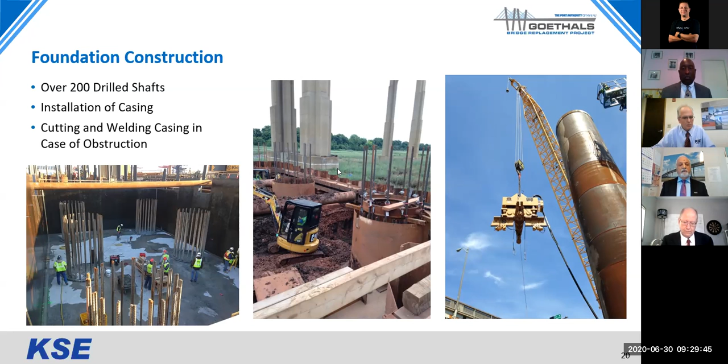Before we got into the rock, of course, we would look at the boring logs as well as the resistance of driving the casing into the ground. We would know that we were getting close, and also with the extraction of the spoil from the drill shaft, we would notice that it was getting close to the weathered as well as competent rock. Once we got there, we would go through the rock and make a rock socket.

After the rock socket is excavated and everything is done, we have to use the shaft inspection device that we would send down there to take 15 readings. 8 readings, according to spec, were supposed to show less than half an inch of sediment after airlifting and cleaning out at the bottom of the rock socket.

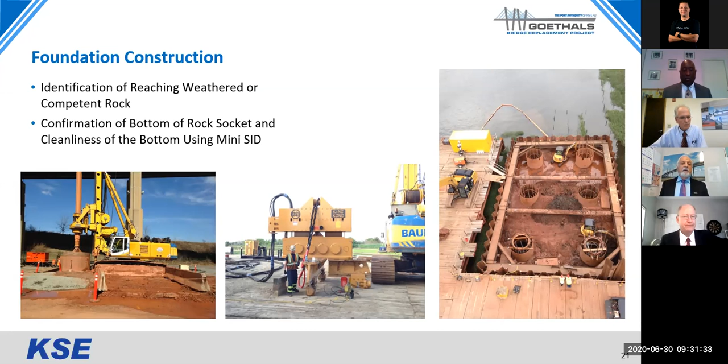Once that was done, with the inspection of the geotechnical EOR from the designer, us, KSE, Port Authority, as well as the contractor, we would verify the cleanness of the drill shaft as well as the rock socket, and after that they would bring the rebar cage. All of these rebar cages were fabricated in Port Ivory, which is on the New York approach side. Next slide, please.

Actually, the rebar cage was made out of the black rebar, and as you can see, we had the cage ring, which is stabilizing all the rebars. On the perimeter of this rebar cage, we have provided, every 1 foot, a 1.5 inch steel pipe, which is plugged at the end of it.

So these are used for the CSL testing, cross-hole sonic logging, after we place concrete in the drill shaft. So once they put the cage in, inside the steel casing, we put centralizers to make sure that it is centralized inside the casing.

And then we use the tremie concrete with the bucket as well as the pump concrete. Once the concrete has come up, at the top portion of the rebar cage on the drill shaft, we had to connect the black bar to the epoxy or galvanized bar, which is going to be connecting to the rebar cage of the pier column. As I said, these are all an integral part.

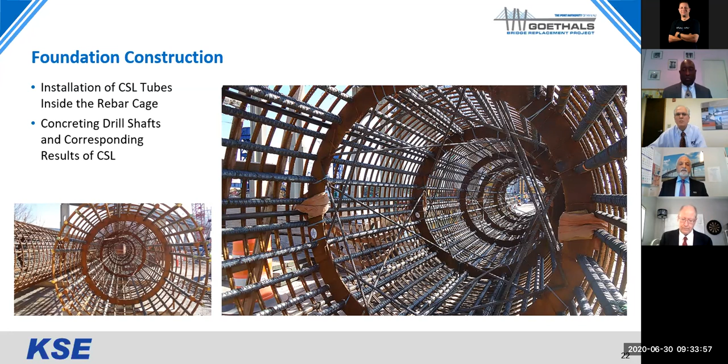Now, on top of the drill shaft, once we bring all the concrete, it's going to combine with the water which was actually inside the shaft. So the laitance comes up, and we still keep pouring until it overflows from the top of the shaft. After it dries out, we have to bush hammer it and make sure everything is clean.

And then on top of that, we connect the rebar cage of the pier column to the rebar cage of the drill shaft with the Lenton couplers. And of course, we have to make sure that the tolerances, everything is taken care of and measured. And then we use the EFCO form for the pier column.

As you may notice, because of the 4% slope of the approaches, the size and the length of this pier column as well as the diameter is different. We had from 4 feet to 9 feet in diameter, 19 feet to 115 feet in height. And for that, we pour the pier column from 1 lift up to 3 lifts.

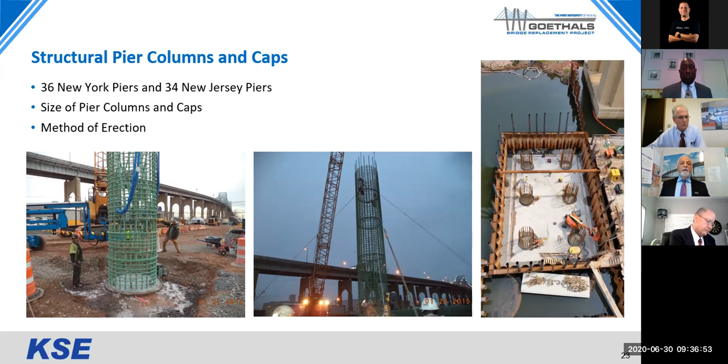I have to mention the fact that through the drill shaft, at different locations, we would have to bring the lightning protection, which comes all the way from the drill shaft, goes to the pier column, and to the pier cap. Next, please. Next slide.

And now, placement of concrete: as I mentioned, between 1 to 3 lifts, we had to do it in different stages for the pier column as well as the pier cap. Now, I have to tell you about the expansion joints of the whole project. This project was done in such a way that it would act as a simple support for the dead load, but continuous for the live load.

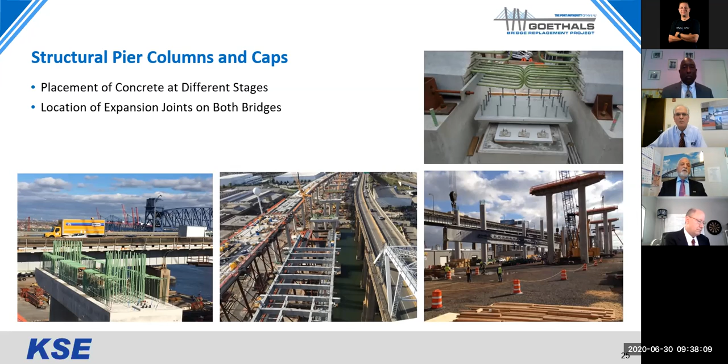These are the 110-ton weight, 8 feet in height, and 175 feet in length. They would come sit on top of the pier cap, and then it would be embedded into a very complicated diaphragm. The diaphragm that contains and combines these girders on top of the pier cap was between 15 to 18,000 pounds of epoxy rebar.

And for the placement of the concrete in that area, we had to use 3 different types of concrete for the diaphragm. This was actually an integral part of that one. Of course, for that area we did have basically embedded cast-in-place concrete, and as I mentioned before, they have three different types of mix design for that one.

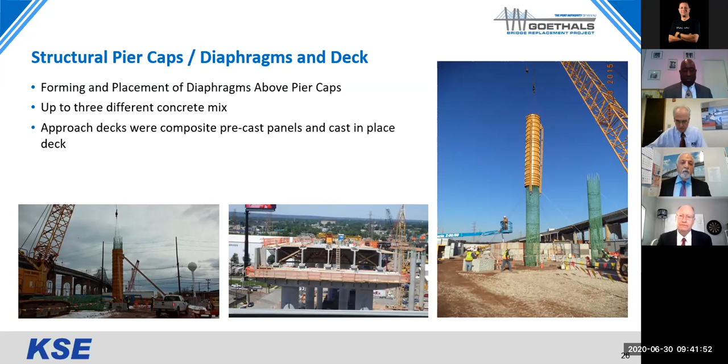Now, on the New York approach of Goethals Bridge, the existing one was the railroad bridge, which had about 6 spans and concrete piers as well as a structural steel railroad bridge. For expansion of this new bridge, they had to remove all those pier columns as well as the structural steel and build a brand new one.

And then on Columbus Day of 2017, one weekend, we had to remove everything which was left from those existing pier caps, as well as the pier columns and structural steel. We removed everything and put all those pier caps that were cast in place on top of the new piers, 2 pier caps in the middle of the whole bridge, as well as the structural steel.

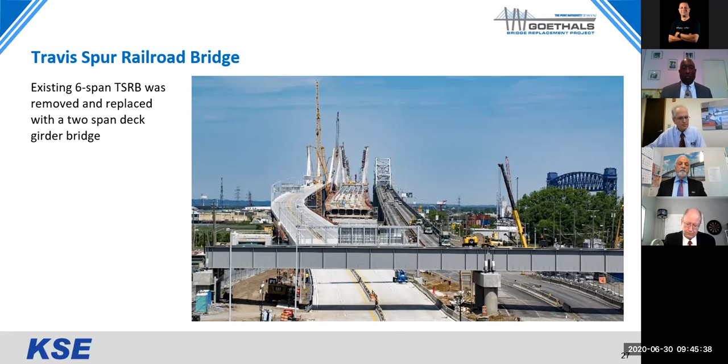The contractor, KWM, had 68 super foremen and all types of inspectors, as well as workers of different fields and expertise. KSE provided 12 inspectors around the clock for the whole weekend, and it was done successfully with no glitches, and everybody was satisfied with the performance of everybody involved.

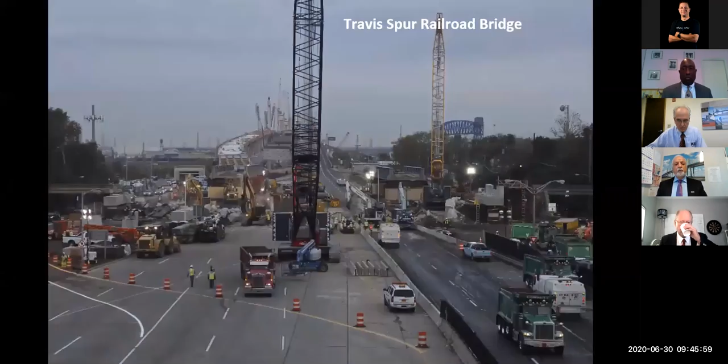There's a time lapse on that one that we should be able to see. You can see the operation was well coordinated with 2-3 different types of hoe rams attached to the excavators. We had 2 huge cranes, as was mentioned by James in the beginning of the introduction.

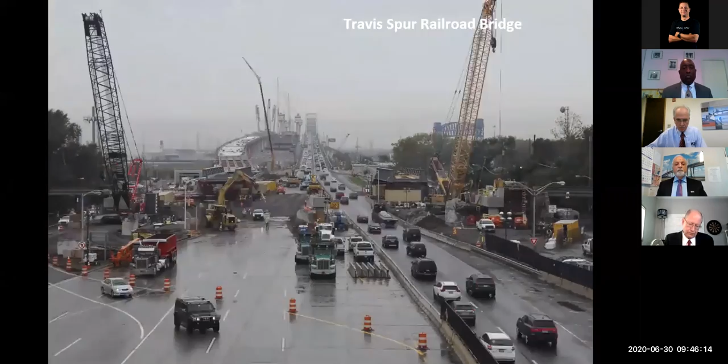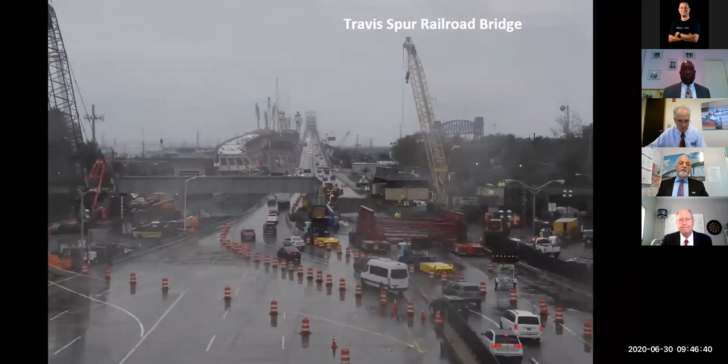There were 27 cranes that the contractor used through the construction of this project, and I had to review the calculations of those cranes. I had to go through all the control checklists and send them back to Shapiro Associates, who were basically in crane construction in the whole tri-state and very well known. They have written specs on the cranes, and if there was any comment I had to make sure that everything was taken care of before I submitted to the Port Authority for final admittance of the contractor bringing those cranes to the job site and utilizing them for the different tasks they have. That was one of the things.

I have to mention that, of course, as James was saying, for the whole entire job, we had 6,000 items of punch list. We had 3,300 NCRs, non-conformance reports. And basically, I had to sign every segment of the job as a construction certificate, signed and sealed by myself as well as the engineer in charge, and the contractor submitted it to the Port Authority. That's one of the responsibilities.

This bridge which was built, we call it the smart bridge. It contains a lot of characteristics; one of the things that is good to know about is the structural health monitoring system. There are devices provided in the area of this bridge that report and detect wind speed, wind gusts, the direction of the wind, temperature, bridge movement, different types of elements of this bridge, which, as I said, structural steel, 8,000 tons of structural steel used on this project. Expansion of the tower, inclination, acceleration in case of earthquake.

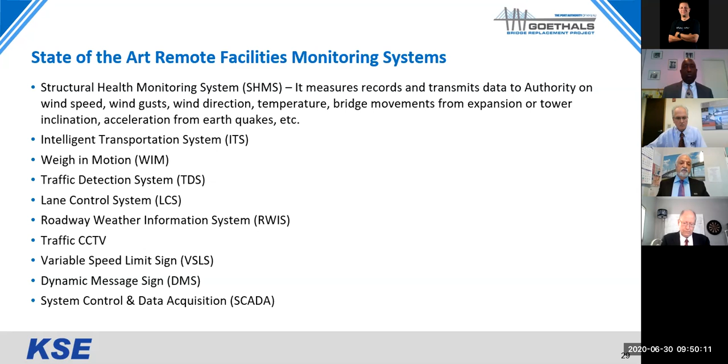They have traffic CCTV, variable speed signs, dynamic message signs, and a SCADA system. And all this is controlled in 2 different rooms on either side, New York as well as New Jersey, and there is a control of the whole project, presently in the hands of the developer, underneath the New Jersey eastbound of the tower, which controls every movement of this bridge and every item that you can imagine, whether it is the fire detection location, electrical work and what have you. Over 150 cameras have been provided over the whole entire job. It's very secure and detects anything you can imagine on this project. Next.

Now, once the bridge was constructed, we had to remove and demolish the existing old Goethals Bridge. For removal, since the design was lost on 9/11 in the World Trade Center, the contractor had to hire R.E. Pearson, an expert subcontractor in demolition, and they had to do reverse engineering to find the member forces on the existing Goethals Bridge truss and find a way to cut the main span as well as other parts. So they had an elaborate configuration on the main span, and finally it was cut.

The piece of main span weighed about 1,500 tons. Again, that was one weekend, for 36 hours. With the cooperation of the U.S. Coast Guard as well as the Army Corps of Engineers, we shut down the Kill, and they brought many barges lumped together with spuds, so that they would bring this 1,500 ton main span truss of the existing Goethals Bridge down slowly, inch by inch, to sit on top of the barge and haul it away to the north side.

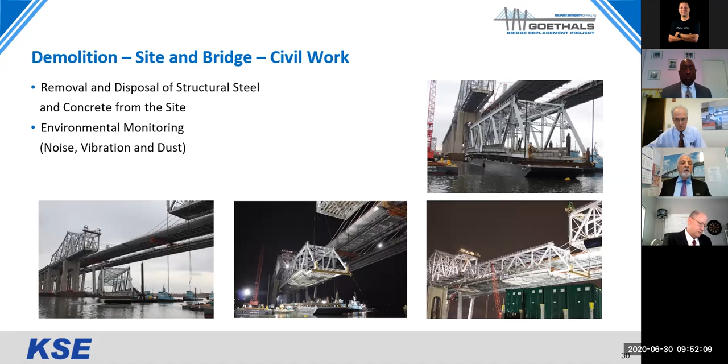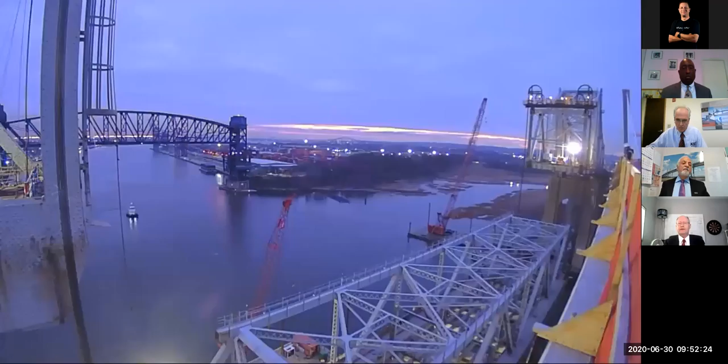And then the remaining portion of the structural steel was cut by shears and different types of cutting devices and lowered down. And of course, there is a short clip that is going to be shown right now. The existing pier columns were cut from the bottom and then pushed over with a hoe ram attachment on the excavator, and you can see that as well.

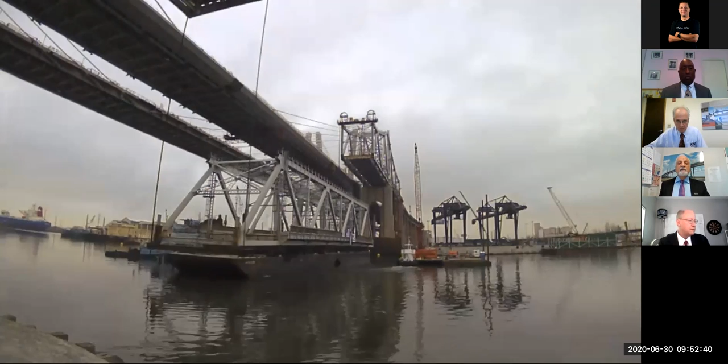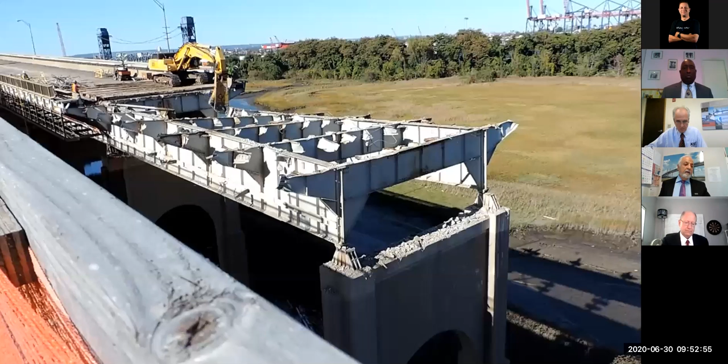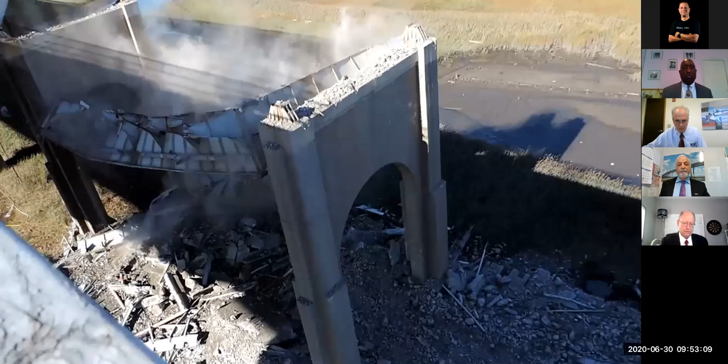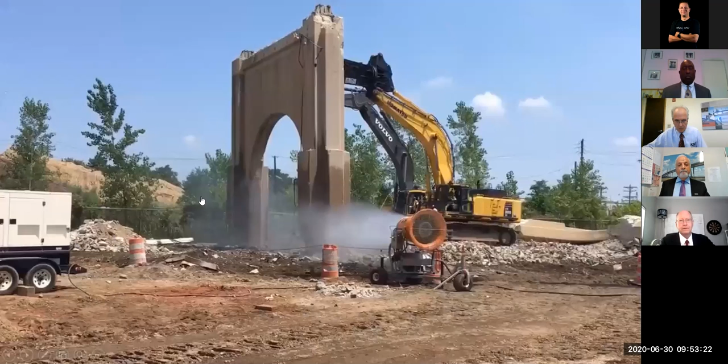This is the lowering of the main span, that 1,500 tons. It was done over 36 hours, the first stage of demolition of the existing Goethals Bridge. As you can see, it was a very elaborate operation. It was done successfully, and now it will show a little bit of the demolition of the approaches, superstructure as well as substructure, of the existing Goethals Bridge. The pier column, a typical pier column.